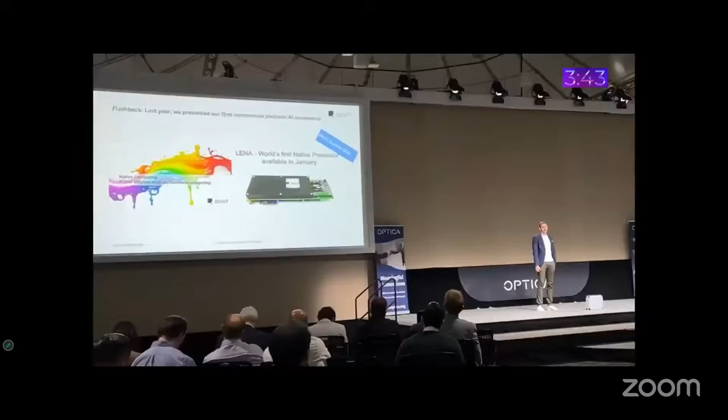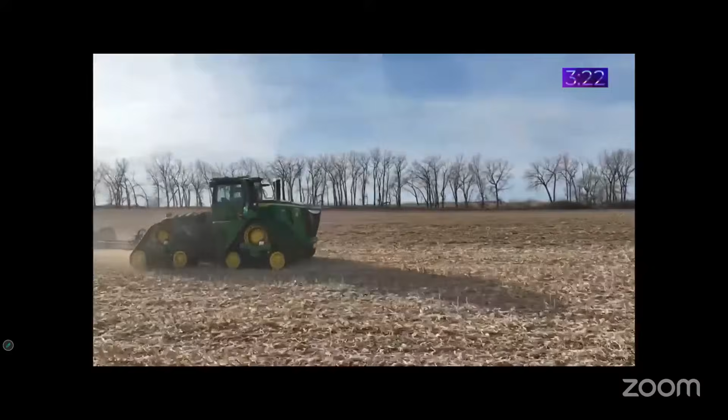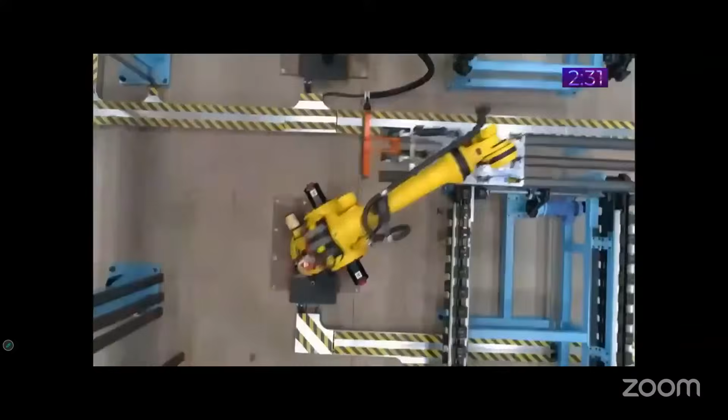Out in the field where the morning breaks, the tractor rolls and the dust it makes. 16 eyes on a wide open view. John Deere driving the whole day through. No hands on the wheel, just light and time, finding its way down the orchard line. From the dirt to the chip to the open road, photons carry the heavy load. This is the way machines see. Beams of light where the future's gonna be. No moving parts, just a steady glow. Lighting up the dark so the world can know. Time of flight on a country breeze. Oh, this is the way machines see.

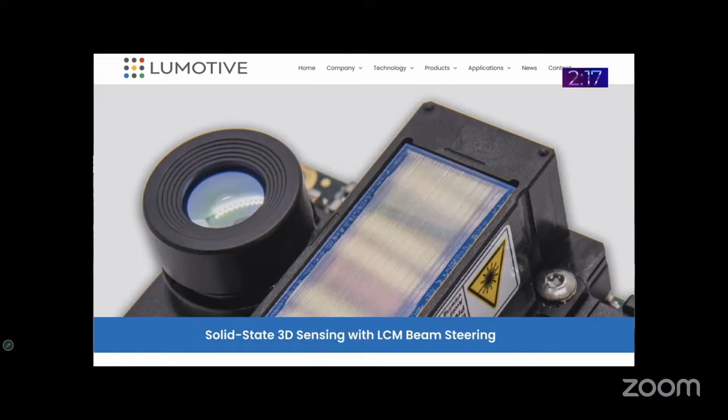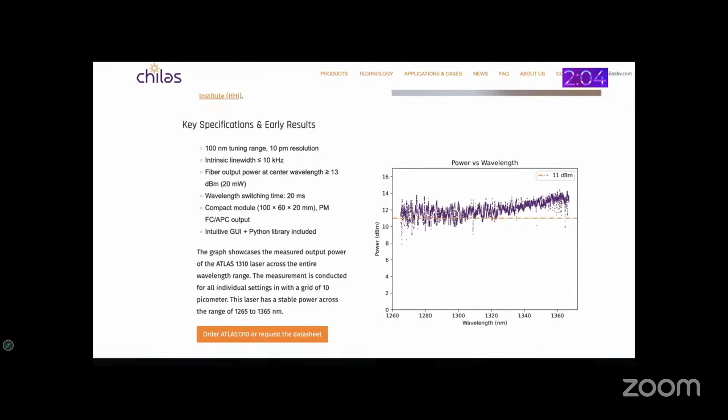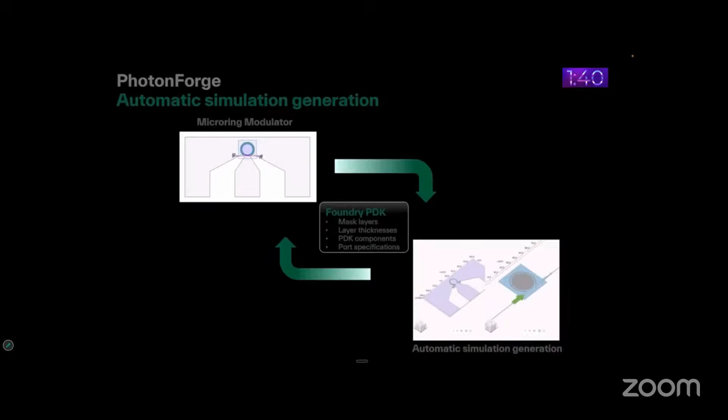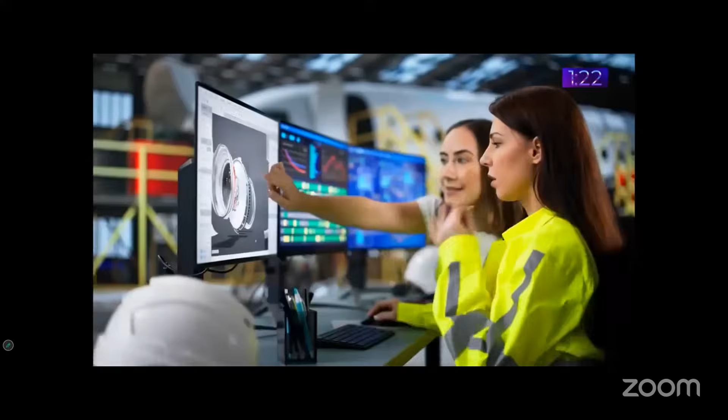Lumotive steers without a sound, a metasurface turning light around. Chilas hum with a narrow tone. A tunable laser, all its own. Point cloud counts every grain of sand. 4D pictures from a chip in your hand. And Flexcompute draws the dream in code before the silicon ever hits the road. This is the way machines see. Beams of light where the future's gonna be. No moving parts, just a steady glow. Lighting up the dark so the world can know. Time of flight on a country breeze. Oh, this is the way machines see.

Smaller, lighter, cheaper, clear. The road ahead is getting near. Cars and robots, fields and skies, all of it riding on a beam of light. This is the way machines see. Welcome to the meeting, join our business conversation. Optica calling and the lights are bright. June 23rd is where we're gonna go. Photonics lifting us up like a breeze. Oh, this is the way machines see. Hey, this is the way machines

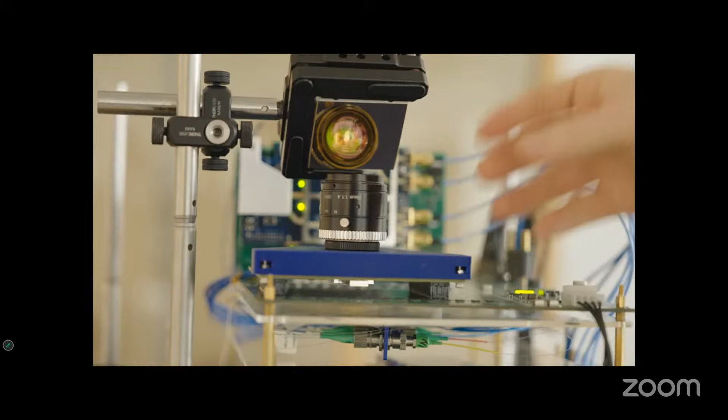Welcome to the last Optica online industry meeting before the summer break. Today's theme is 3D sensing. For the next 90 minutes, contribute to our discussion on AI-driven stereo vision, time of flight, structured light, LiDAR, and the emerging field of photonic radar. Learn how photonics is driving 3D sensing towards mass adoption while cutting weight, size, power and cost. Time now to go live.

Hello everyone and welcome to this very special online industry meeting. We are talking about 3D sensing, and as you heard with the song, this is the way machines see. We are really lucky today because we have an integrator who is here to tell us about what they need, and then we have many companies offering part of the solution. And the magic of these meetings is that we can all work together to satisfy the demand of the end user. So let me first of all introduce myself and the team.

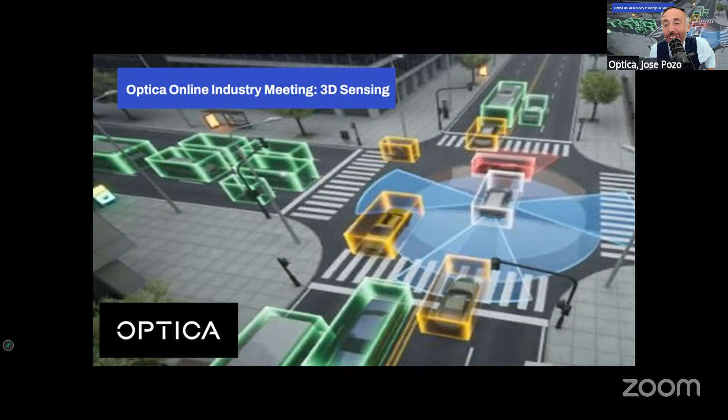Today we have two teams like we usually do: the integrator, the end user, the company that is here with a shopping list looking to fulfill it with companies offering 3D sensing solutions, and then the enablers. The integrator is John Deere, and the enablers are the LiDAR company Pointcloud, the LiDAR company Lumotive, the heterogeneously integrated semiconductor laser company Chilas, and the software company Flexcompute. We are going to do magic today because all of you have to collaborate to make sure that we all satisfy the needs of John Deere.

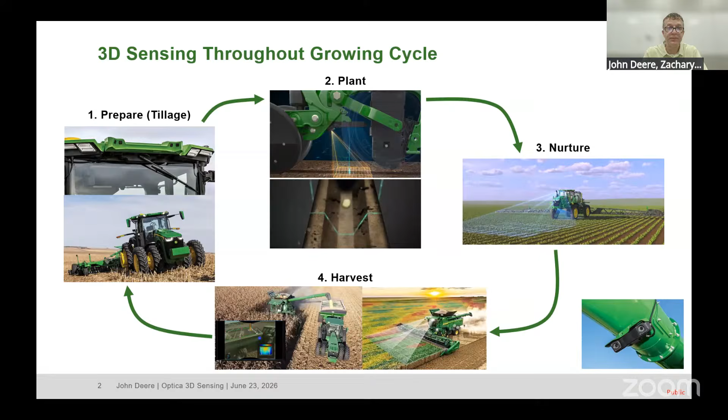So Deere doesn't just make equipment for large acre farming, and 3D sensing is becoming more integrated across all of our market segments. All of our markets have something in common, and that is the scarcity of qualified labor or the availability of any labor whatsoever in these remote areas where a lot of these tasks are taking place. So all of our customer segments are asking for autonomy or at least smarter machines to help them get their job done.

This is happening in our turf business, and this is an exciting development because we make these machines in pretty high volume relative to our big tractors and combines or construction equipment.

When it comes to construction, there are at least 1,000 different ways, I think, that 3D sensing can improve our equipment. But I'll give you a couple of examples of what we've implemented thus far.

The first product I will highlight is a system we call Smart Detect. Smart Detect uses a stereo camera to detect obstacles behind a wheel loader. Wheel loaders drive in reverse a lot, and construction work sites can be rather chaotic. So a system like this can really improve work site safety.

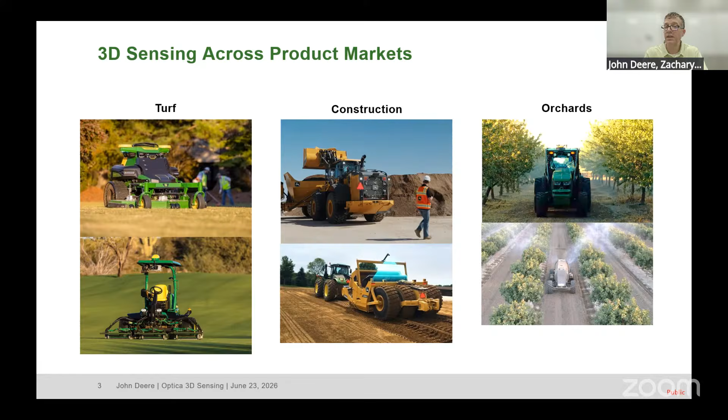So when it comes to these various 3D sensing technologies, I'll start with cameras. And there are a couple of things that we really value in an image sensor. We do a lot of complex multiple view geometry to sense depth, so global shutters are strongly preferred to rolling shutter for that reason. And at the same time, we work in very challenging high dynamic range conditions. And global shutter and HDR is a hard combination to find, but that is something we are definitely interested in.

When it comes to LiDAR, my criticism over the years has been that it's always been rather expensive and quite poor at penetrating the thick dust that we tend to see in our environment. So that really has limited the utility of LiDAR. Now, that said, I think the emergence of LiDAR at longer wavelengths can improve dust penetration, so that's helpful. Some, but not all of our applications could benefit from LiDAR with extreme depth accuracy. That's hard to find.

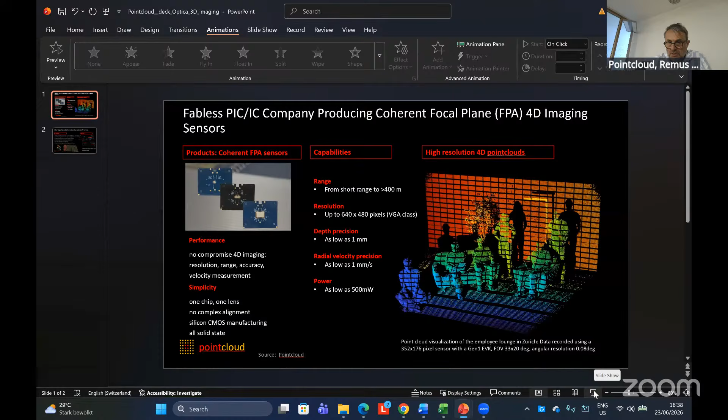All right. I think I'm just going to go quickly through the introduction of the company. We've been around for a long time; we started about 10 years ago. We pioneered a new technology. There are a lot of names people refer to in the literature, but we usually use coherent focal plane array technology. Some people use switched arrays or all sorts of other things.

But at the end of it, we manufacture these chips, and the easiest way to think about it is it looks and feels like an image sensor. It's a large two-dimensional array of pixels, and you can think of each pixel as being a coherent transceiver. By doing this, we combine two old concepts. One is coherent ranging that comes from radar, which has been around for a long time, with focal plane array architecture. So what you get is the best of both worlds. You get all the advantages of coherent ranging: resolution, range, accuracy, velocity measurement, everything that Zach mentioned earlier that they would like to have.

And it is a focal plane array sensor, so it's just a chip in the focal plane of a lens. So it's very similar to a camera as far as architecture. It's very simple from a system integrator perspective. It's one chip, one lens. There is no complex alignment.

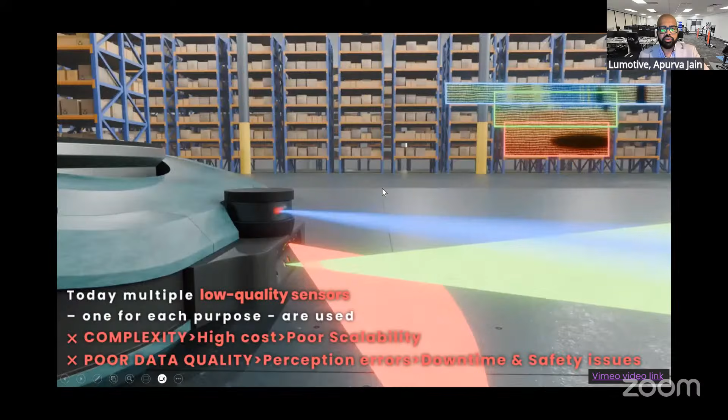the robots are using multiple sensors, as Zach, you were also presenting, like your current equipment in every direction. Sometimes you use 4 to 6 sensors to do different things. Same thing happens in the warehouse, where they actually had 2 stereo cameras and 2 line scanners. So one line scanner looking at just the floor to know if there's a cliff or a fall or a step. There are 2 stereo cameras for object identification, classification, collision avoidance. And they had a long-range sensor, like 30 to 50 meters, to look at the localization so the robot can move. And imagine this in all 4 directions, right?

So this is the number of sensors, just 3D sensors that we're using in addition to RGB. And we call this a complex way of doing things, very high cost, poor scalability. Each sensor is purpose-built for just one type of sensing. And in spite of this, with one of the biggest West Coast warehouse or e-commerce companies, who is a strategic investor in Lumotive, I cannot name them, they had a huge operational inefficiency because even in spite of all these sensors, there was a lot of gridlocks between the robots. The robots will go and catch each other.

And when you look at the full animation, we have kind of mimicked it. And they would get into gridlocks because of sensor-to-sensor interference. They'll see too much saturation from the ground sometimes, and they'll think that there's a hole in the ground, and they'll stop there. Or they'll get too close to some metal structures, and there's multipath artifacts, and they wouldn't know how to get closer to those objects. So humans have to interfere and unlock these robots. There was 40% of inefficiency in these operations.

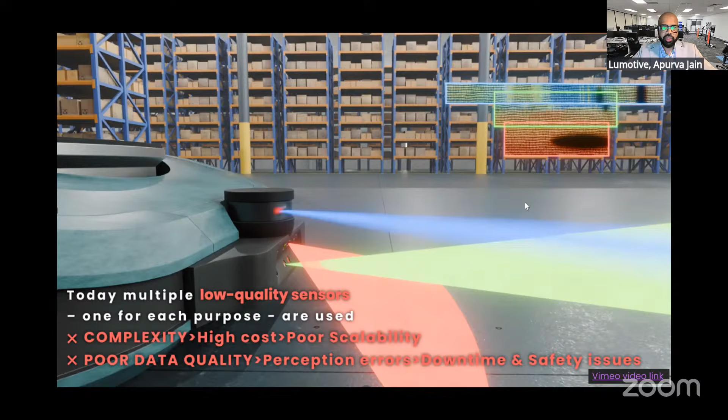So this is where Lumotive comes in with their chip-based technology, LCM beam steering technology, that allows programmable sensing. With one sensor, we can enable looking at the ground with the performance specs that you need for the ground. We are able to create a slice that is long range to look at your localization, and we're able to create your region for collision avoidance, all in one sensor.

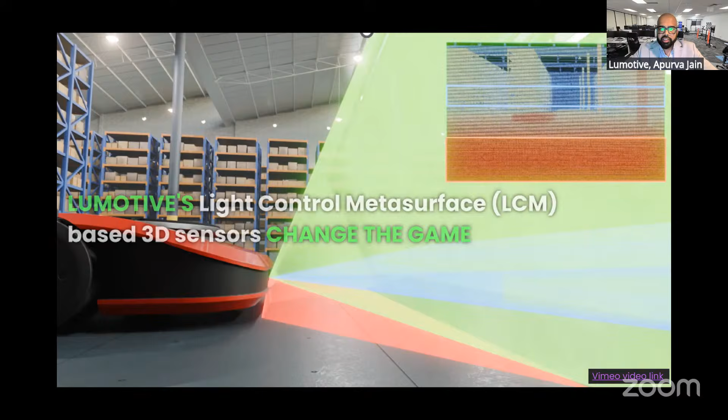And this is while improving the point cloud quality, reducing the saturation, enabling a very high dynamic range sensing. By very high, what I mean is we do 4 to 5x of normal laser dynamic range using our LCM technology, and enable high frame rates where you need it. So with a single sensor, we replaced actually 4 sensors. So 4 went to 1 in this particular warehouse application, and we are enabling that for other kind of platforms as well.

Now, this is where Lumotive is very much like a semiconductor company as well. We're building the light control metasurface LCM chip, which is an integrated CMOS chip, enabling LiDAR platforms that really end up in total cost of ownership being much lower, highly scalable for the robotic and autonomous platforms, enabling much higher data quality, especially when it comes to artifacts like saturation, like multipath, and outdoor performance, even for iToF sensors, by the way.

And then adaptive sensing, enabling you to do different kinds of performance in different regions of interest, and making it highly dynamic for changing and very dynamic environments, right?

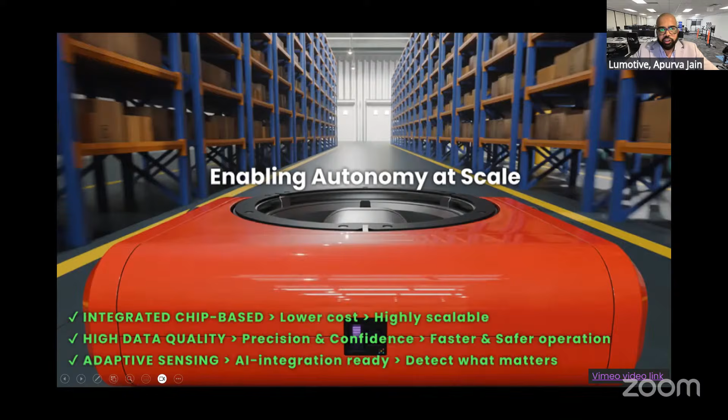We also have partners like Leopard Imaging, who are building RGBD sensors. This is using an onsemi iToF sensor with 1 megapixel. We use it in the VGA mode, 640 by 480. But with the LCM technology, we're able to extend the range of iToF from typically like 5 meters; in our architectures, it's about 30 meters. So we can do 30 meters of ranging with iToF with this type of resolution.

And then we are also developing several dev kits. I put an example here, which is a 180-degree sensor. So full 180 degrees by 110 degrees using a single sensor. Now, this type of optical design can be applied to both DTOF and iToF. We are compatible across different image sensors.

Our Gen 2 chip is for 9xx nanometer, targeted for line scanning and LiDAR applications. But we also have a 1310 and 1550 nanometer chip. So we're not wavelength constrained, right? We built that for the data center market, but we're also getting a lot of interest from FMCW companies for the 1310, 1550 nanometer chip to do solid state scanning for FMCW systems, in the slow axis usually, right? But there are various things possible.

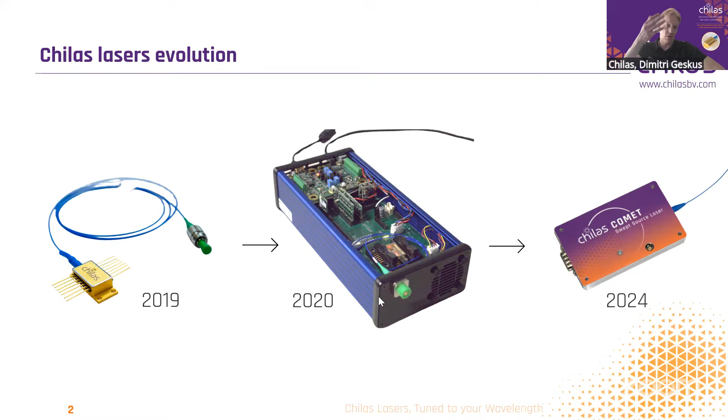Meanwhile, we're expanding our wavelength portfolio. We've got our workhorse at around telecom wavelength, the C-band, which tunes a nice 100 nanometers. We also can go to slightly longer wavelengths - this is interesting for fog applications in some cases. For dust, I don't know yet, but perhaps we should find this out in the future. The technology around 1310 is also emerging - we've got a new product since 1 month on the market, which delivers 100 nanometer tuning range around 1310 nanometers.

We've got some specialties for some biomedical applications typically. That's why I'm also interested in applications where you look at spectroscopic features in the field like Raman or any absorption lines. So there we also have some light sources at shorter wavelengths.

Where are the applications? Well, we see a ton of applications in this event that we're now looking at. For LiDAR, there's a lot of wind LiDAR applications in the field where you want coherence length of multiple meters, so you can say something about the speed of the air in the atmosphere. There's photoacoustic imaging - a laser pulse penetrating into your skin, and there's a microphone array which is read out by using optics. Our lasers find their way to the market to do 3D imaging inside your body for these kinds of things, and vibration sensors - a lot of automotive applications run in this field.

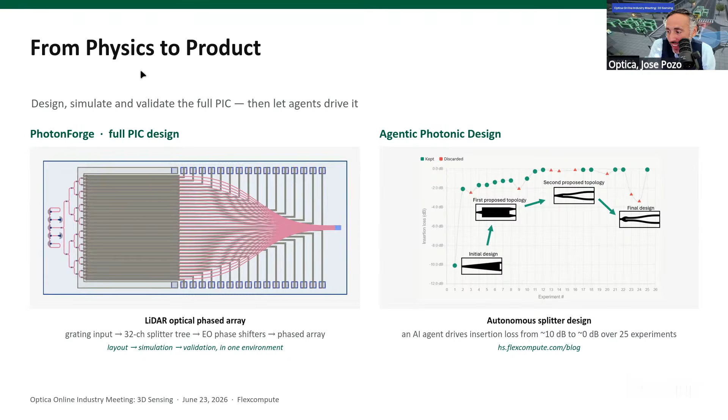Thank you very much for being in the room with us today. Flexcompute, you have been supporting Optica in many ways, but today you are really bringing a very interesting topic, which is the use of meta lenses in LiDAR. And when you saw before the LCM structure presented by Lumotive, the question is very clear.

How can you help them? They are capable of steering over a wide angular range of 160 degrees. They can also extend this to even 190 degrees of beam steering.

Is there a way that you could help them going? This is very interesting, I think our team is already working with Tidy3D in some ways. So the question goes back to you, Apurva. How can you challenge them? What do you need from them?

Yeah, I think from our semiconductor side, we are very impressed with the capabilities that Tidy3D is bringing. It's not easy to simulate so many different pixels over the entire surfaces. Honestly, I personally don't know the details, but I know my team is pretty happy with what they're seeing from the simulation environments that they're producing. So we're looking forward to more collaboration.

I'm looking forward to more collaboration with you, Philippe, from Flexcompute. Apurva, you have been great today at the meeting. I would like to also say that my very good friend Rimos has been great, and Hendrik. But I would like to go to Zach once again for the closing remark. Zach, you have heard today about point cloud, about the LCM of Lumotive, and about the simulation of Flexcompute. What is this idea that you go now with?